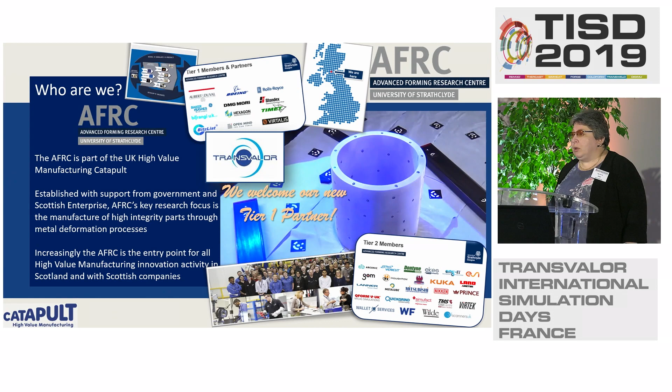As I was telling yesterday at the pitch, we are sitting in between industry and university. So this partnership is exactly what we have to do. We have to make the full adaptation of the things which are developed in the institutes for the needs of the industry, such that it will be really possible to do in the real industrial processes.

So in our center, we have very many things at a time. We have all kinds of industrial trials. At the same time, we have microstructural characterization. We have mechanical tests. We have all kinds of design issues. And modeling plays a very, very big role, because this is the language in which all these parts are talking to each other. And we are very lucky. We have almost all possible software which can calculate something, and are proud to have Forge NxT and DIGIMU with us.

But here is a little problem: you can be very rich, you can have a very fancy and very powerful car, but if you are getting into a traffic jam, it is hardly the question of the capacity of your car if everybody is standing. And this is the question which was raised a few times in yesterday's and today's discussion. It is the question of the main bottleneck of all simulations.

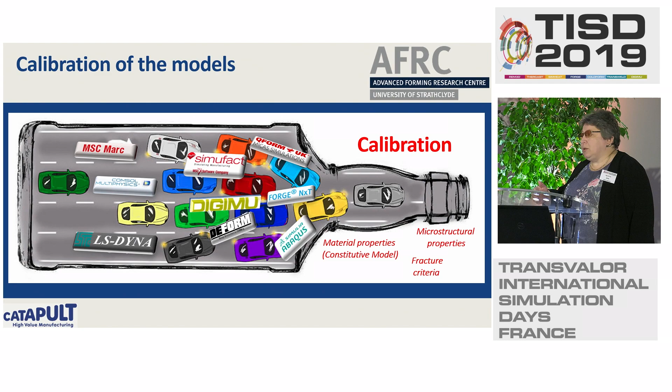At the same time, we understand that it is a battle which is a bit too big for one particular organization. And here we think that the efforts of different companies and different institutions who are dealing with this have to be combined. So what is the result of poor calibration of the models?

If you pay attention to this, you have the left and the right. This is forging of disks, standard hot forging. Very well-known processes, very well-known models, and again, we want to get the prediction of the defects, which are localization, shear bands, underfilling, and again, we are getting something like the picture at the left, where we have everything nice and smooth until we do the first forging.

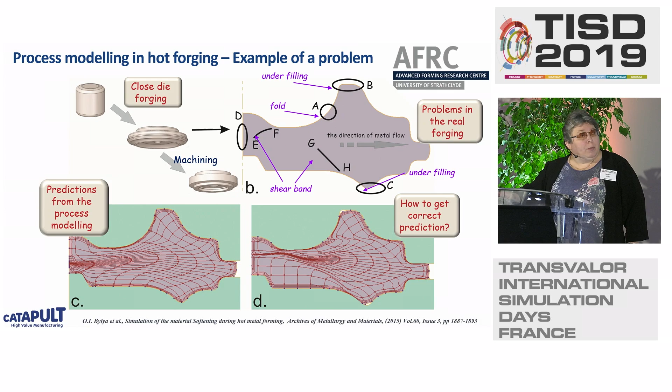A similar situation happens with microstructural modeling. This is the benchmarking which was recently done in the Advanced Forming Research Center. We asked many different companies and many different software providers to make the prediction of the microstructure using the models which they have with the parameters. We have chosen the very standard material, Inconel 718, which is well known, almost everybody has it, and you can see in the most left column, it is strange.

So in the most left column you can see the experimental data. It is two different kinds of equipment, hydraulic press and screw press, so it is already industrial equipment. And you can see the real zones of recrystallization in the experiment, and you can see the prediction. I don't write here which column belongs to whom, but as you can see, it does not matter. There is no champion in this competition.

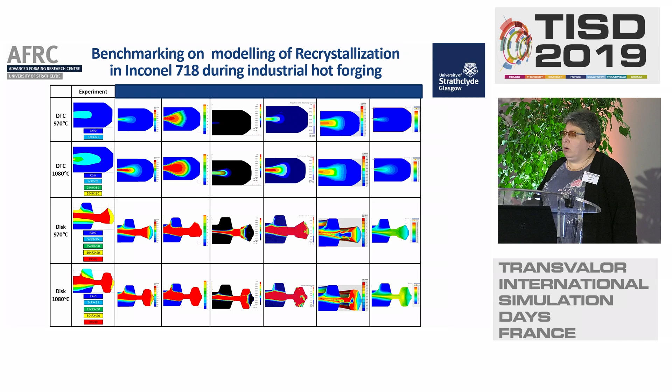All predictions are bad in this or that sense, and it means that if we want to use our modeling as a predictive one, we definitely need to do something about this. And the main background of these problems is that almost all we have now in terms of the curves, almost everything we have now in terms of microstructural data, originated from laboratory uniaxial tests. The idea of this test is, of course, absolutely clear.

We want to have a pure form of deformation, a pure phenomenon, but if you look at this disk in this picture and the points 1, 2, 3, and 4, you can see that if we plot their trajectories in terms of strain rate, temperature, and strain in this graph, we will have quite complicated curves. At the same time, if we take our tensile tests, what will we have? We will have these small, short, red lines.

And these short red lines can be mainly at quite low strain rates. If we go above a strain rate of 1, it is very tricky to get even this short line. So our chances to predict all this complicated behavior on the basis of these small pieces of information, from my point of view, are quite low.

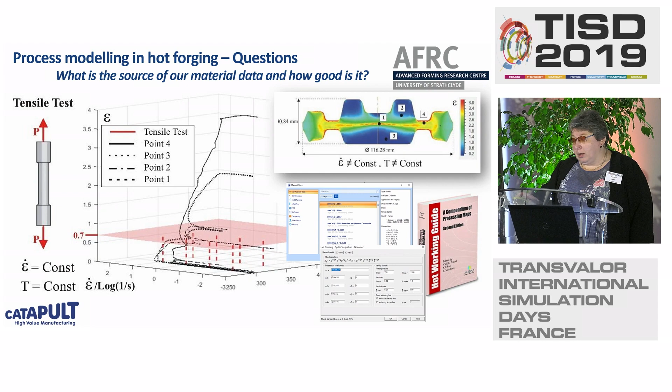And it means that whether we like it or not, we are again and again dealing with the same thing that was discussed today in the first lecture of Professor Tekkaya, that we have to extrapolate data, and this is always very risky because we don't know what is happening there.

But in cold forming we have some tricks, as was told today, for example, extrusion, and then from the extruded part we get the specimen and make further deformation. When we come to high temperature deformation, it is very difficult. I can stop the experiment, but when I cool it, cut the specimen and then heat it again, a very big part of the microstructural changes which are there and which actually define its behavior will vanish. And so again I am not getting proper information.

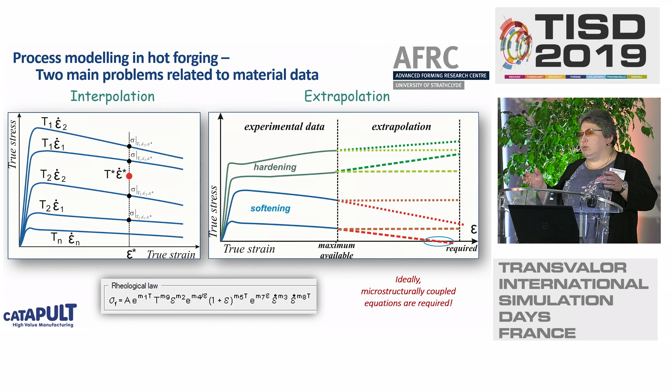So because of this, whether we like it or not, we are again and again coming to the question that we need something more than simple calibration on the basis of lab tests. Of course, in this case, it would be nice to have coupled equations such that we put some parameter which deals with the microstructure into the equation. So our microstructure transforms, and correspondingly, our stresses also change. So this brings us to the need to look at the microstructure very, very carefully.

And we have the choice either to go to classical phenomenological models, JMAK is one of them, there are a variety of them, or to go to something more scientific, more complicated, like multi-scale modeling, for example, a full field model. Of course, being close to the industry, we would always prefer to stay with the phenomenological equations. It is easier, it is simpler, it is clearer. But as you will see now, it is not always possible, because there are always the same problems. We have a lot of constants here and there.

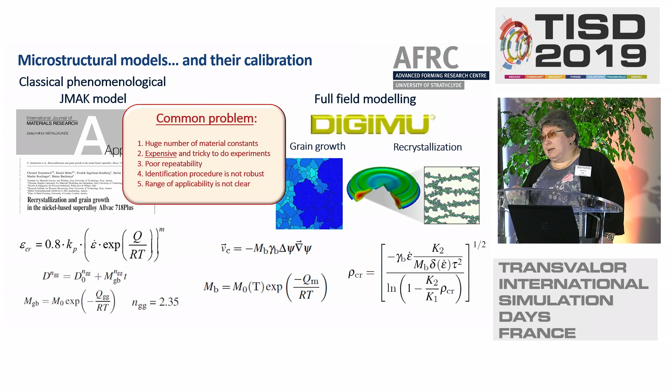The second thing: when we need to find these constants, very often the experiments which are prescribed for us are very tricky. Pascal mentioned that one of the services we do for our customers is material characterization, defining the parameters of the models. It is very costly for the customer in any case and very difficult for us to do, because these experiments are very, very tricky. It means cost, they are not very robust, repeatability can be low. So it makes us think whether we can have any alternative.

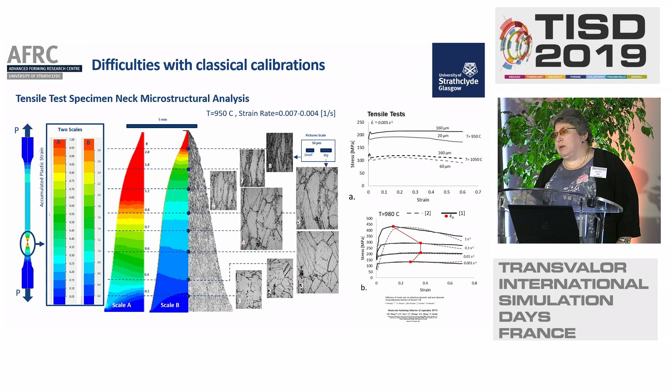For example, here is a tensile test. I want to find the yield stress or, for example, the peak stress. You can see the tensile test at the top and the compressive test at the bottom. We have different shapes of the curves. There can be no pronounced peak in the curve. So there can be many different problems which, if anybody is interested, we can discuss at our stand. And going further, the question is: can we suggest something new, something completely different from lab tests?

And here the idea we have is to try to get some information directly from the forging test. You can see here in the videos our forging on the hydraulic and the screw press. It is almost all the conditions you have in industry: a 500-ton hydraulic press, a 2,100 screw press. The only difference is that you can see there are thermocouples. So we are doing an industrial test, but adding more metrology, such that we know all the conditions more accurately, and we are getting all the details and all the information.

On one hand, of course, we have one big drawback, because it is no longer homogeneous deformation. It means we cannot say that it is constant strain rate, constant temperature. We have a complicated history. We cannot say that it is only dynamic recrystallization or only recovery. We have a mixture of everything, but we have some benefits from it, because at the same time we can see different states of material deformation and different states of microstructural transformation. We can see the boundary between, for example, non-recrystallized and recrystallized, and we can see the kinetics of how this recrystallization develops.

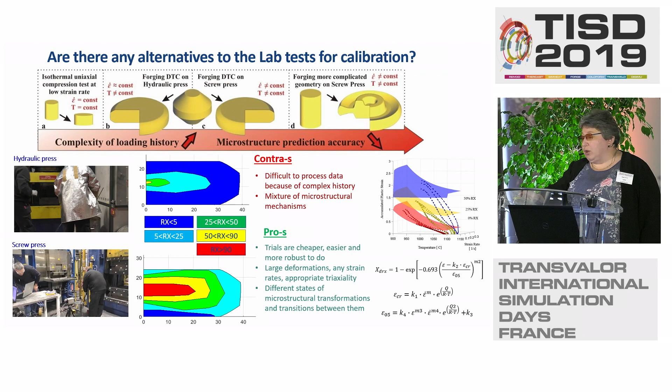Again, the benefit that, for example, if you will see the JMAK model, theoretically I can do calibration from a single test which is there. Here, again, I will go very brief because I don't have much time. This is our way how to take into account everything and to make our finite element simulation as close to the reality as it is possible. So this is the way how we are developing the digital twin.

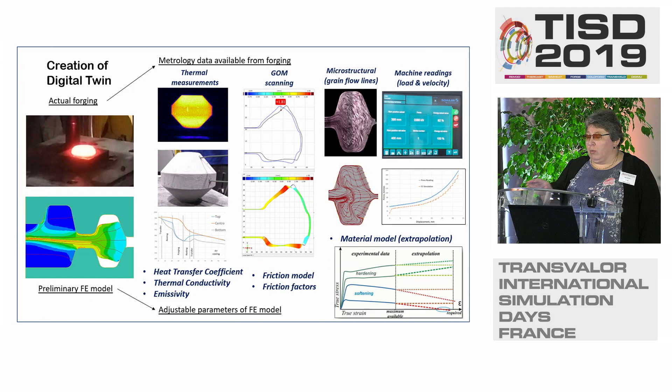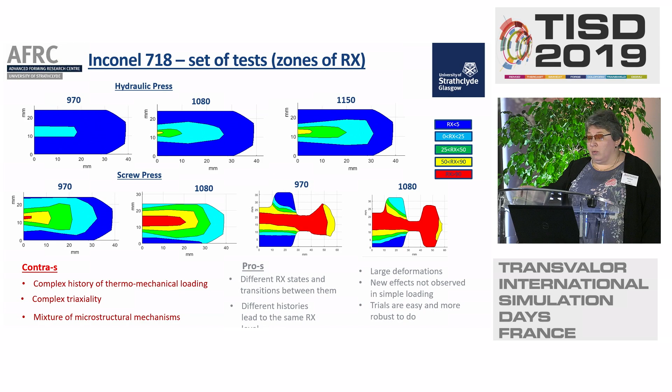And on the basis of this digital twin, we are plotting these zones, so we have EBSD from one hand, digital twin from another. On the basis of the two of them, we can make these pictures. So we have the big set of experiments. And finally, for each point where suppose recrystallization started, or for any point, we are getting the trajectories. So we have the history of the strain rate and temperature, which can be put into DigiMu as, for example, Pascal was telling.

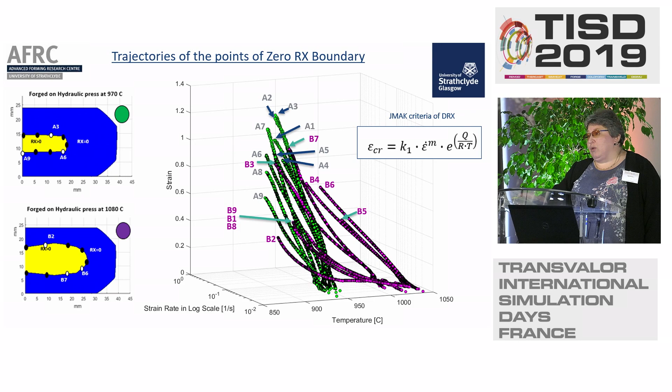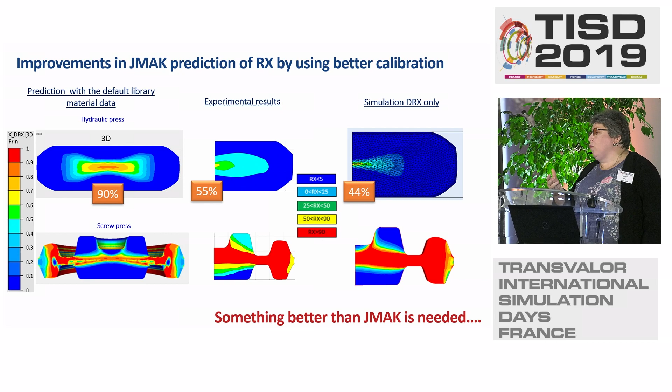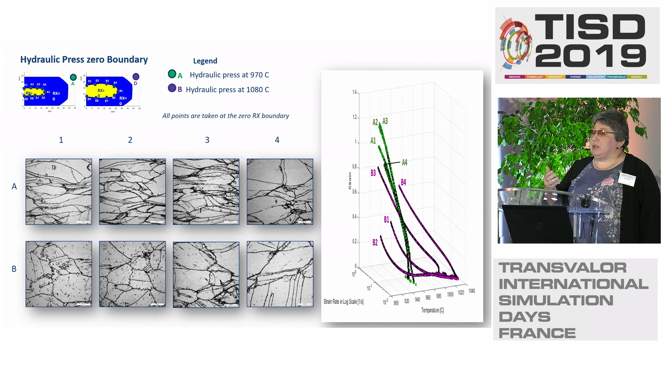But of course, as you can see, this complexity of the process makes us very far from the chance to improve the JMAK model. We can improve it, but this is the limit of this improvement. And it is pretty clear that something more, something different is needed to go further. Something different means that our recrystallization is not simply some accumulated plastic strain. If you look at these different points, you will see different deformation of the microstructure. So it is exactly what DigiMu is trying to take into account. Because of this, our logical decision was to go to DigiMu.

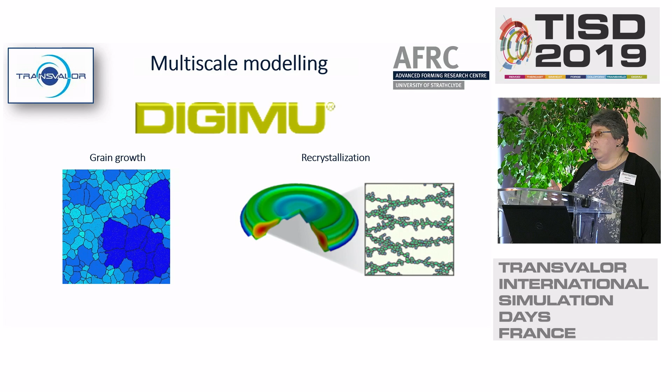And here again, I should acknowledge the respect to Transvalor company, because everybody needs to understand that till today, multi-scale modeling was mainly the point of research. It is mainly research institutes, mainly research where we were simulating. It is maybe for the first time an attempt to bring these research things to the engineering level, to the level of the industry. Of course, it is a very long and very complicated journey, but our attempts make at least me optimistic that it is doable, that one day we will be able to describe a real industrial process.

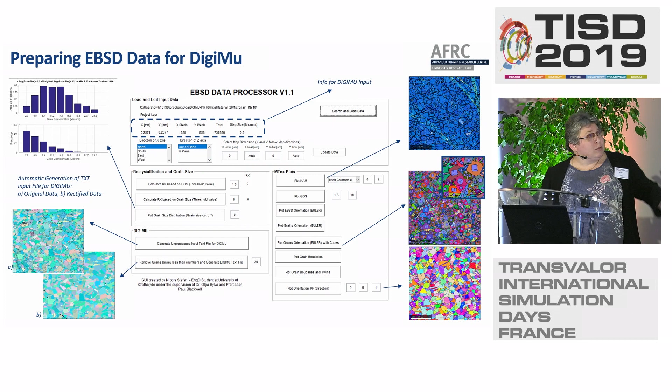So, what we are doing here in collaboration with Transvalor and CEMEF. First of all, we are doing these things to be oriented to our customers. EBSD is now less exotic than it was 5 years ago, but still there is the question of the processing of EBSD images. So we are making small pieces of automatic processing of the standard EBSD image. For example, this is a GUI which is prepared for you to get the crystal suitable for DigiMu from the standard EBSD image. It will be cleaned, all small grains will be removed, and you will have something which you can use directly.

Then the second thing, it is recommendations. For example, everybody knows what is average grain size, but then the question is how do we calculate it? By area or by frequency? Very often we don't even think about it. Here we clearly understand that when we are talking about grain size, it has to be the grain size calculated by area.

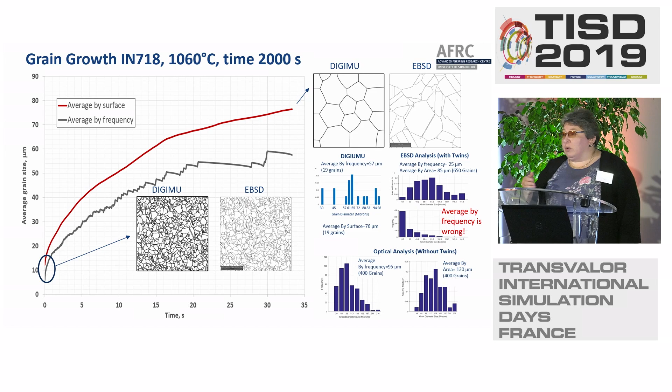Why? Because if you take, for example, this room, and we try to put here elephants and monkeys, and then calculate the average by frequency, hardly more than 3 elephants will be able to come into this room, but monkeys can be thousands. So immediately elephants will lose without any chance to win in frequency. But if we calculate the volume which the elephants occupy, then they can compete with monkeys very well, because each elephant will really contribute. So this is the same thing we are having here.

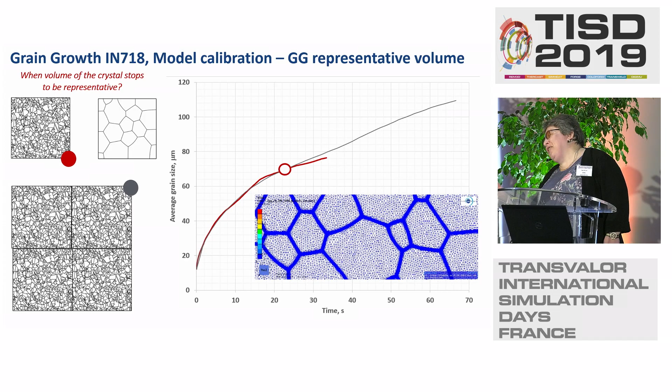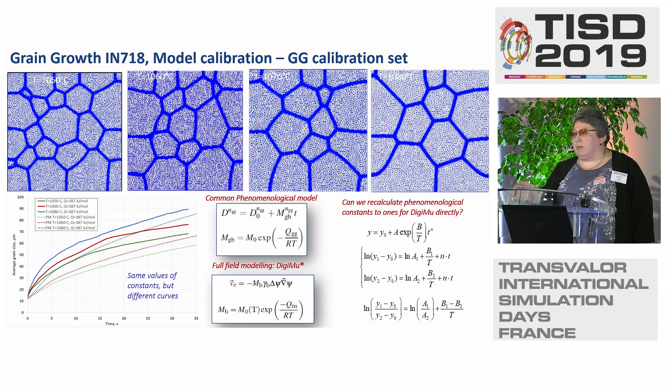Then another question which was asked here, what is the size of the polycrystal? Again, this is maybe not that impressive, but I would like to show, yes, I know it is the end of the story. So this is all our background work about how we can do calibration. This slide shows one trick due to my laziness. For example, the question, if I already have my phenomenological parameters, can I recalculate them into DigiMu straightforward? Yes, there is some chance, but with some limitations. If somebody is interested, I am ready to discuss it more.

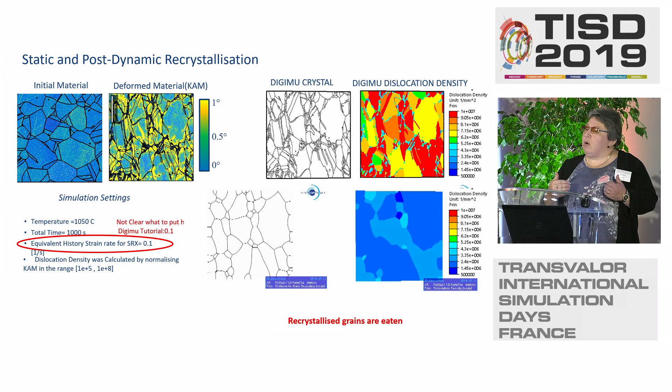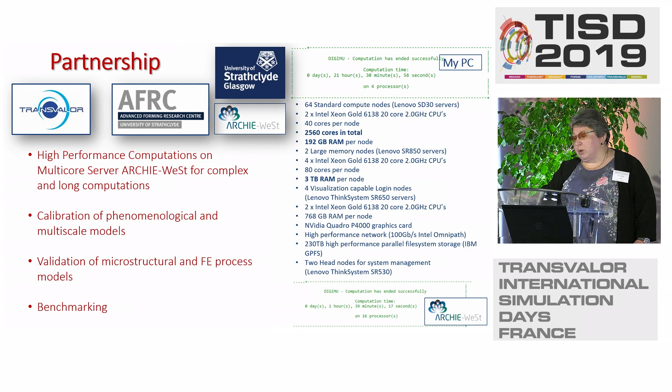We tried dynamic recrystallization. Yes, we have got some nuclei. We have tried to do static recrystallization. We got the problem that all our nuclei got eaten. It means that here DigiMu again reminds us that it is not a take-and-press-the-button thing. We are dealing with the next level of complexity of software. It requires our inputs and our respect. So because of this, we are making our possibility of high performance computation, and you are welcome to join us on this trip towards robust calibration and robust microstructural modeling.